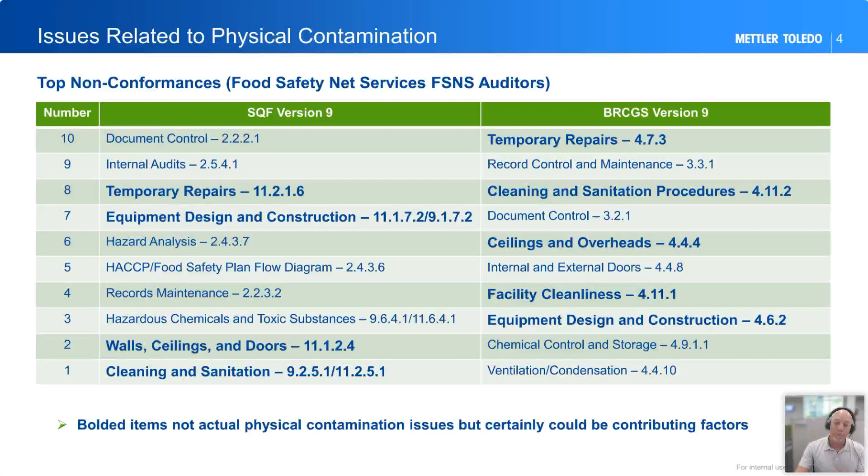The next step, if I can't get rid of the risk, is to try to prevent it from entering the product flow in some way, shape, or form. Maybe I've got covers over exposed product areas. And then the last leg of the stool is detecting it. If I can't get rid of it and I can't prevent it, then if it does get into the product, I'm going to have some way to identify it and hopefully remove those non-conforming items. But one of the things still missing within the industry is when we find contamination, even from a metal detector or X-ray system, we're missing the part where we do root cause analysis, figure out where it came from, and implement corrective actions to prevent it again.

And if we look at it, particularly nowadays when there's a stronger focus on the environment and waste reduction and things like that, that's 69 million pounds of product that ended up as waste in some way, shape, or form. That's 69 million pounds of packaging material that ended up in a landfill somewhere that didn't need to be there. The only reason that it was there is because there was a physical contamination found within that product in some way, shape, or form. And again, to me, those are preventive things that we can do.

I think we're going to be challenged for many, many years to come to get rid of biological concerns. Microbiological entities will even adapt over time. We might find a way to help sanitize or kill them, but they're microbiological. They're going to adapt in some way, shape, or form and become maybe more immune to those protections that we do. But physical contamination is an area that I truly feel is one of the contamination issues that's somewhat solvable. But it's solvable by understanding that we have great equipment designs, that we have great supplier controls in place, that when we do identify an issue, we do something truly about it. We figure out where it came from and we figure out how to stop it from ever happening again.

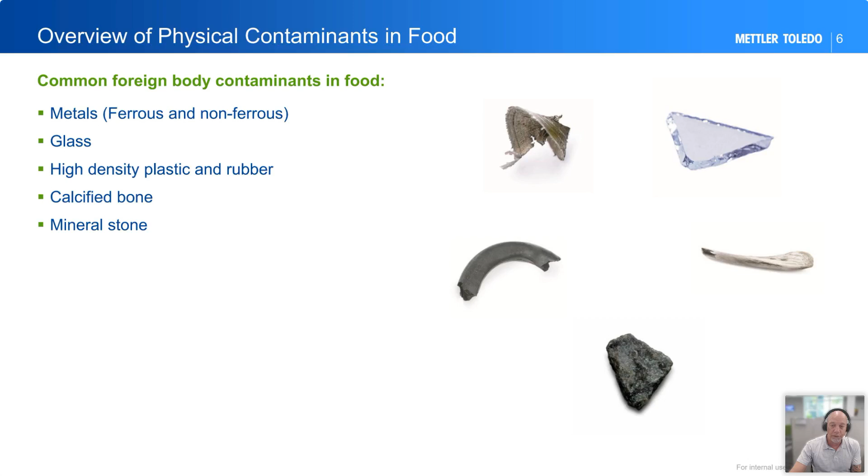And then we actually had a client in this week, and one of their biggest problems was stone. They have a vegetable type product, and I guess in the harvesting of the vegetable, they have some concerns with stone material getting through there. So they've deployed the application of X-ray to resolve that problem. And we were doing a bunch of validation tests with them with all these different sizes and types of stone material, ensuring that the system was able to identify those sorts of things. But this is very common as far as physical contamination that creates all of those recalls and all those millions of pounds of product.

As far as the overview of technology, again, we'll just spend a little time on this for those that may not be familiar with them. You have metal detectors, probably one of the most common types of inspection systems out there historically, able to detect ferrous, non-ferrous, and stainless steel materials. Of course, there are different non-ferrous materials: copper, lead, brass, bronze, zinc, those sorts of materials. There are different grades of stainless steel, 304, 316.

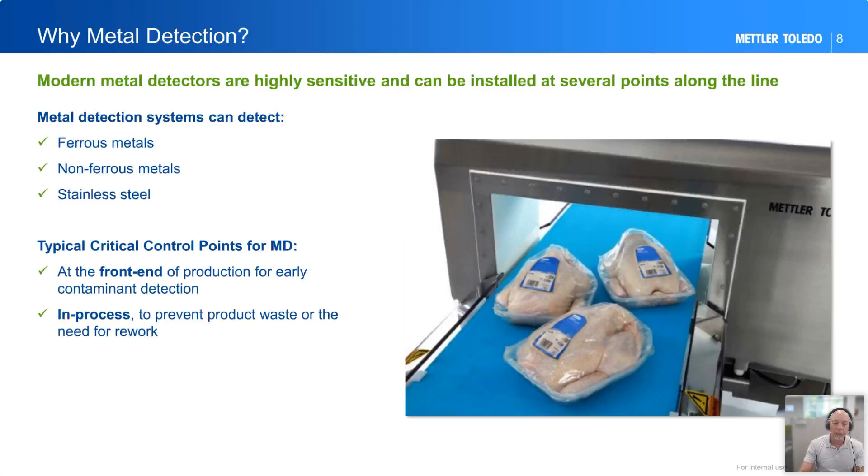And the metal detector is basically working on a conductivity principle, where there's a set of coils inside of the device where we generate an electromagnetic signal. As a conductive material passes through that opening, it affects that magnetic field, and we monitor that, and that's how we are able to identify a detection.

And the key point there is that it's a conductive detection device. So the materials, in order for them to be detected, have to be conductive. That's why it's able to see metal, because metal is in fact conductive. But of course, we have different variations of conductivity in the various metal types. Gold is a great conductor. Aluminum we have, and copper we have for electrical wiring, so they're great conductors as well.

Stainless steel, however, is not as good of an electrical conductor, which is why stainless steel is more challenging to be identified in the metal detector. So you're going to see a different size of ferrous detection capability than you would a non-ferrous, than you would a stainless steel. That's why we tend to see different sizes within them.

Metal detectors will also start to exhibit what we call orientation effect. So depending on which direction, let's say, a piece of wire travels through the detector, it will have a different effect on it. And it has to do with the magnetic field and how the lines of flux rotate around various items. I won't get too technical on it. But the conductivity aspect is also important to understand from a product perspective.

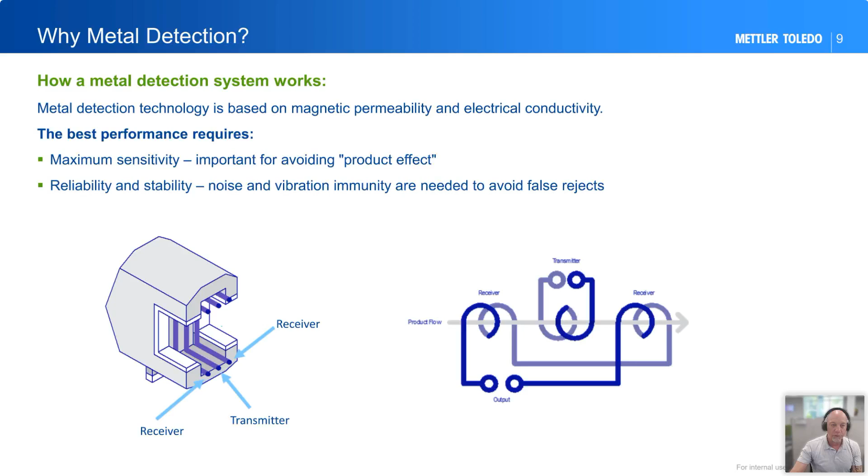As far as X-ray inspection, X-ray allows us to see a little bit more from a contamination perspective. We can still see all those metals, ferrous, non-ferrous, and stainless steel. Although, again, there are some metal types that are more challenging to an X-ray system than other metal types. And that's because an X-ray system is working off of a density principle. But because it's working off of a density principle rather than a conductivity principle, we're able to see other materials that are not conductive, like glass, like stone, like bone. So X-rays allow us to see a much more diverse range of contamination types.

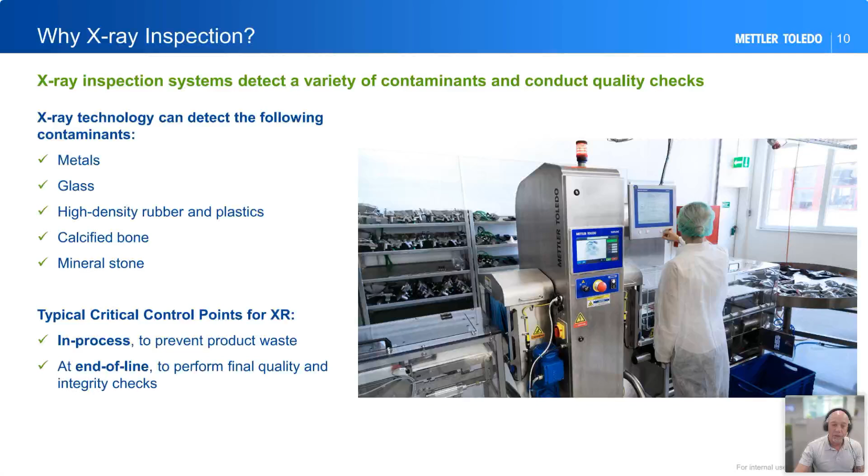But again, there are limitations within an X-ray machine just as well. The way that the X-ray machine works is again on a density principle. So the more dense an object is, the more X-rays it's going to block or attenuate, and that's how we're able to detect them: we measure the amount of attenuation within the X-ray photons to understand whether or not a material is present. If there's a material present in the product going through an X-ray and it's a dense material, we're able to identify that.

So X-ray doesn't care about the conductivity of it. So when we have a wet or conductive product, there's no real need to reduce the sensitivity of the X-ray system just to get that product to pass through there. So we're able to run those products maybe at a more sensitive level than other applications.

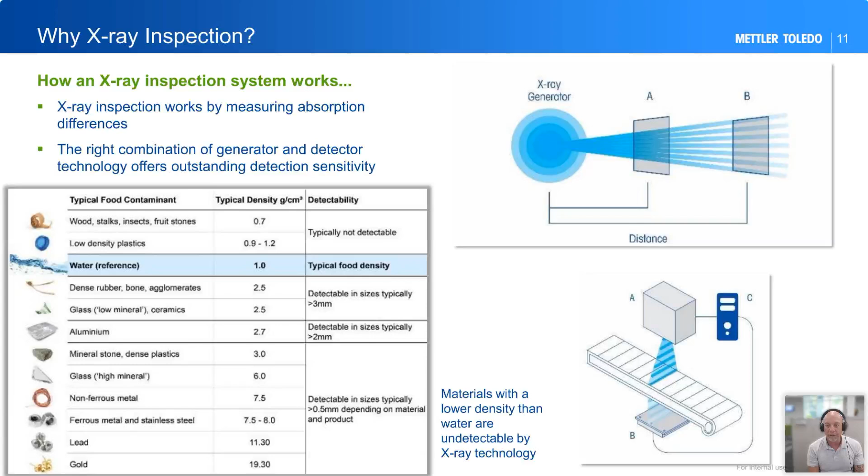So a block of cheese, very harmonious in its density, relatively easy to inspect within an X-ray machine. That noisy image, like a box of cereal or a bag of crisps, those are going to be a little bit more of a noisy image, where it may be a little bit more challenging for those applications. But again, there are technologies out there today where we're able to overcome a lot of that density variation challenge and still get very, very good inspection capabilities. So that just kind of gives you a general idea of the two different technologies that are probably most common.

Of course, there are other means of protecting against contamination. The first one is, again, not allowing it into the area. We do that through a lot of the GMP programs, to where we don't allow pens in our pockets, and we don't allow a whole lot of staples on the production floor, because we don't want those getting in as contamination. So we eliminate it as a possibility.

And then, of course, there's other technologies out there, such as filtering, magnets, sifting, floating products, and letting the heavy product or the heavy contamination sink in a floating application. There are many, many ways to help to try to control them. Those metal detectors and X-rays are probably the most common electrical means of doing that, where some of these other manners are more of a physical, mechanical type operation to do that.

When we look at the value of inspection throughout the process, this is really something that I truly believe will help to reduce that 69 million pounds of recalled products out there. If we start to look at the entire process itself holistically, oftentimes these inspection devices, metal detectors and X-ray, historically have been positioned at the end of the line. It makes a lot of sense to put them there.

You've got the product in its final package. There's no further processing that's going to happen. So the contamination risks are, well, they're certainly lower. I don't want to say they're relatively low, but they're certainly lower at that point once it's in its final package and in the closed compartment. And so that's often where we see these devices.

However, if you think of the end of the line process, so I've now purchased my raw ingredients, I've now mixed them all together, I've now maybe done some baking or cooling or whatever that further processing is, I've now put them into a package, and then at the end of the line, I find a contamination and I throw it all away. I throw away the package, I throw away the raw materials, I throw away all the time and effort that we took to manufacture it, all the energy that we took to manufacture it.

All that really can be seen as waste, and that's simply because we only had that end of the line type inspection. Whereas if we start to inspect the product throughout the process at key points, we can truly start to recognize some increase in the value.

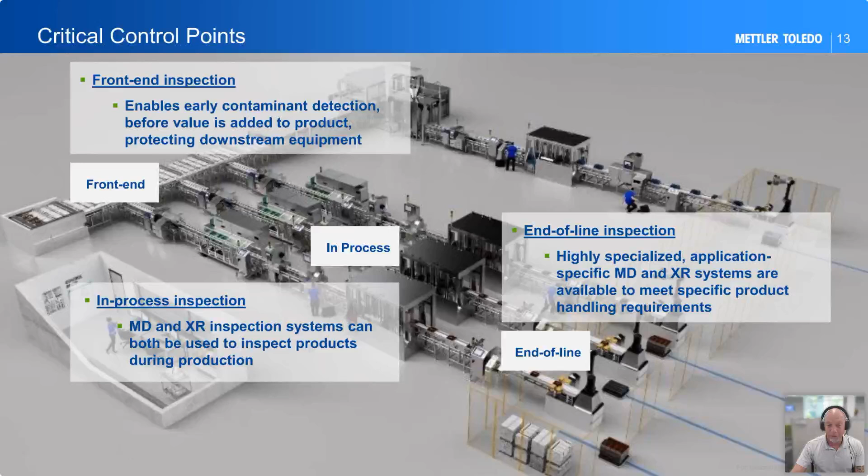Whereas at the front of the line, I'm simply rejecting that cup of flour, and I know that flour supplier is the cause of that problem. So the root cause identification is very easy, and the corrective action can be easy at that point as well, because I would go back to that supplier and say, hey, maybe you need to install some foreign material devices into your process so you're not sending me contaminated product. And that's why I really like to look at the holistic view of all of those process areas.

In the receiving area, number one, have validated supplier controls in place, even contractual controls in place, where you're demanding that they send you good quality product, where you even go out to their facilities on occasion and audit their facility and their foreign material programs. You're going to be able to identify those risks very early in the process from that perspective, as well as if you're inspecting them as you're receiving them.

Maybe we're offloading a large tanker full of flour through some vacuum system or whatever into a silo, have an inspection point there. And then again, we're rejecting small amounts of material versus an entirely packaged product at the end.

I don't see near enough systems in the batching area. I'm usually taking a 50-pound bag of flour or something like that and taking 4 or 5 cups and scooping it into a smaller batch product into a plastic bag that's going to be batch number 1 and batch number 2. And so out of that 50-pound bag, I might have 30 batches of product that I've measured out of it. It's very easy to install a throat style detector as we're pouring it into the bag that's sitting on the scale. Pour it right through the throat detector.

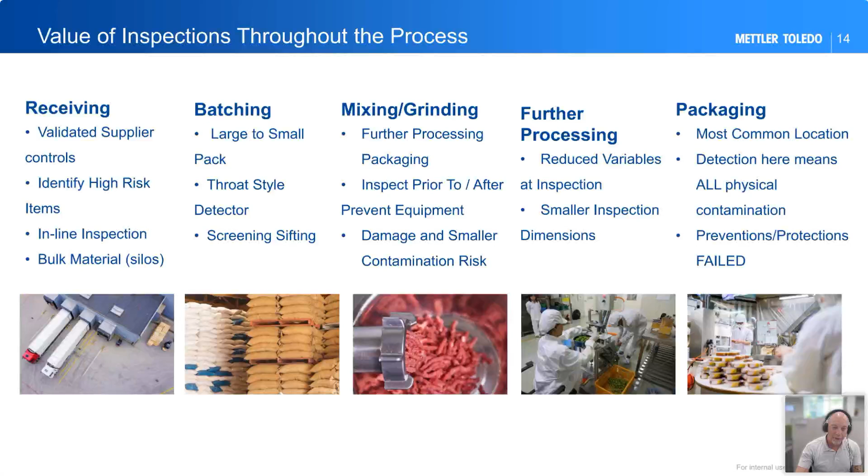And then oftentimes that waste reduction can actually almost become an ROI on the investment of the equipment at those locations. So it's very important to kind of assess that entire process area. Don't just look at that end of the line inspection because that's what we used to do or that's how we've always done it in the past. Begin to consider some of these other areas. There's truly a lot of benefit to that.

And then again, optimizing the inspection location. So try to place inspection devices where we have the most consistency within product conditions, within product flow. As we have those tighter, more consistent operational characteristics of the product in production, we're able to set tolerances on these devices much tighter and get better sensitivities out of them.

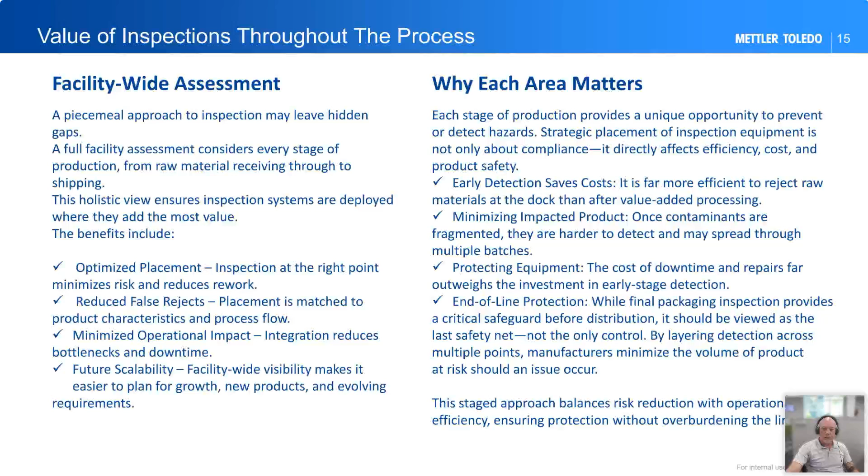Again, don't ignore that end of the line. But again, I don't feel that should be the only inspection point throughout your process. Not only the value proposition, but even more so, the part that I feel is missing the most is that easily identified root cause and that implementation of a corrective action to prevent that from happening again. I think that's what's going to really have the largest impact on trying to reduce those recall numbers, on trying to experience and understand true value from an ROI from installing devices such as this.